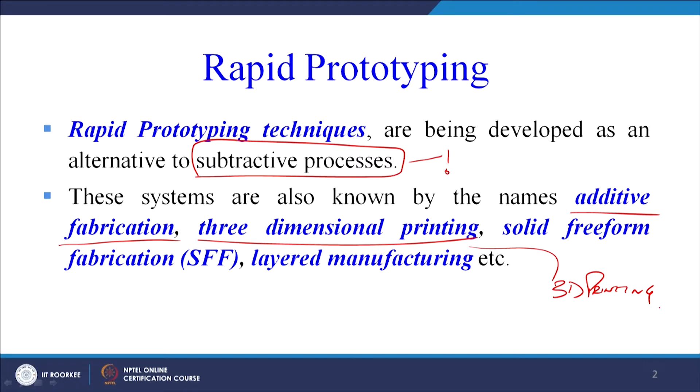These systems are also known by the names of additive fabrication, as I have already told, additive manufacturing, 3-dimensional printing, a very common rapid prototyping technique, 3D printing, then solid free form fabrication, layered manufacturing. There is a process called laminated object manufacturing, which is LOM. So, different strategies, different processes are there that fall under the broad umbrella of rapid prototyping.

Now, they can be classified based on the type of raw material that is being used in a process. We can use a photosensitive liquid polymer, in the stereolithography apparatus, where photosensitive polymer is used as the raw material. In case of selective laser sintering, we use powder as the raw material. In case of laminated object manufacturing, we use sheets as the raw material. So, we can classify the rapid prototyping processes based on a number of factors. One of the factors can be the type of raw material that we are using.

Now, rapid prototyping technologies are able to produce a physical model layer by layer. This is very important and already highlighted. We make a prototype layer by layer, a layer on top of the other layer, directly from their CAD models. As I have already highlighted, with the development in our computational systems, CAD models are being developed for most of the 3-dimensional objects, and then these models can easily be used to create a prototype layer by layer, one layer on top of the other, without any tools.

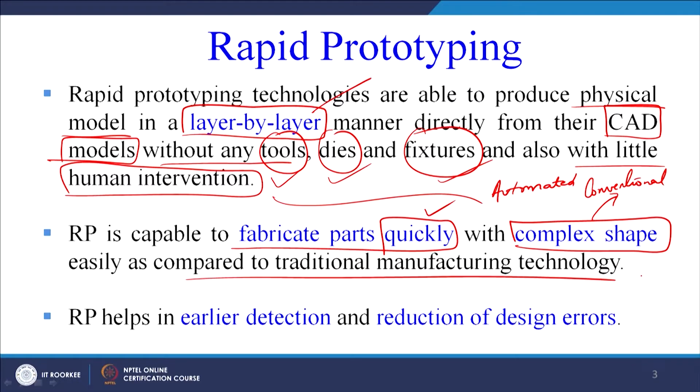Rapid prototyping helps in earlier detection and reduction of the design errors. As I have highlighted in the beginning of today's session, if 3 or 4 parts have to be joined together, we can create these parts from their CAD models easily using any of the rapid prototyping processes, and then we can try to assemble them and see the kind of interference, whether they are looking good or not, or what kind of joint can be better designed. So if there is a faulty design of a joint, it can be improved. So early detection of errors and remedial measures can be taken accordingly. So this will reduce the design errors.

Now rapid prototyping we are doing after our design has already been finalized. So the design is ready, now we are trying to prototype it. During the design we have taken care of all the guidelines that we have discussed till today. So these guidelines we are now trying to check using prototyping, and if there is a problem we will go back and try to change our design based on the various manufacturing guidelines that are known to us.

So therefore rapid prototyping is improving the timely manner in which we are able to launch our product in the market, or helping us to manage our time more effectively and efficiently, because quickly we are able to detect the error, immediately we take a remedial action, again we prototype and see whether the product is ready to be manufactured or not.

So we save time using the rapid prototyping strategies. Now what is the methodology? A very common diagram which is given in most of the books. So rapid prototyping in its basic form can be described as the production of 3-dimensional physical parts from computer aided design data in a decreased time scale.

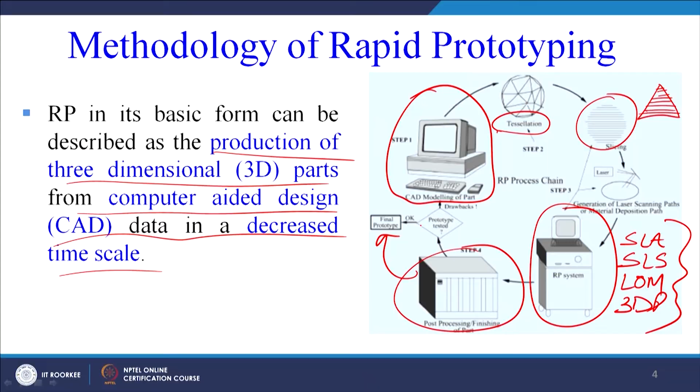We need a CAD model, then we have to do the pre-processing in which we decide the number of layers and the thickness of each individual layer, and then we take this file into our rapid prototyping system, where the physical 3-dimensional object or the prototype is created. Then we do the post processing; any support material we have used during the creation of our 3D prototype has to be removed.

Sometimes additional curing may be required, sometimes some surface treatment or surface cleaning may be required. So all that is done during the post processing of the prototypes, and finally our prototype is ready to be used or to be checked. So for this process there are standard guidelines that have to be taken into account. Now what are the design guidelines? Let us try to see those guidelines.

The first thing is how big a prototype we can produce. So the average workspace, and the word average here is very important, because as I have already told, 70 to 80 different processes fall under the broad umbrella of rapid prototyping. So the average workspace available in commercial RP systems, and this is general, not specific to any one rapid prototyping process, is 150 millimeters to 380 millimeters in X direction, 150 to 390 in Y, and 150 to 380 in Z direction.

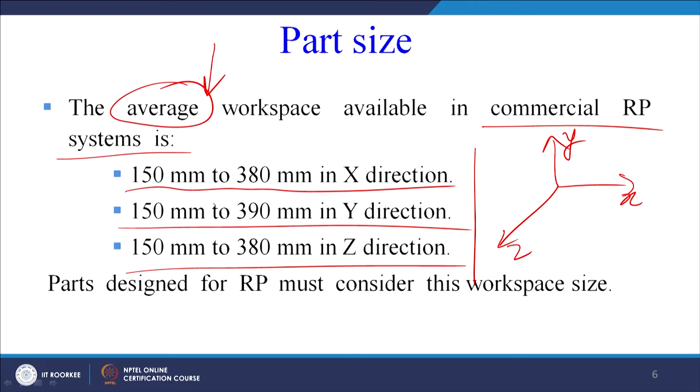So there are 3 directions, X, Y and Z. In all the directions the dimensions are given for the maximum size of the prototype that we can produce. Parts designed for RP must consider this workspace size. Different types of machines will have different workspace arrangements, or different biggest sizes of prototype that you can produce. So all those things have to be taken into account when you are designing your product.

Many times it may happen that our product is much larger in size compared to the workspace available in the rapid prototyping machine. So we can scale down our model, so that the prototype we are creating is a scaled down prototype as per the dimensions available in the machine we are using to create a physical 3-dimensional object. All those possibilities do exist, and we must take advantage of them wherever possible. Regarding part size, when a part is too large, decompose it into smaller sections. So that can also be done.

Suppose we want to create a model of a very large torch, which is not possible to create in a single part. So we can decompose, or explode, the complete product into individual parts, and each part can be created using any of the rapid prototyping machines, and then we can assemble the parts.

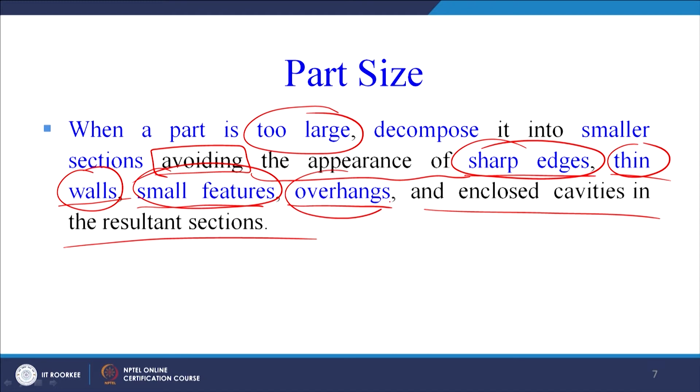So we must decompose the bigger product into smaller sections, avoiding sharp edges, thin walls, small features, overhangs and enclosed cavities in the resultant sections. So we can decompose the large part into smaller parts, but all these guidelines we must keep in mind, otherwise even the smaller parts will become difficult to fabricate using the rapid prototyping processes.

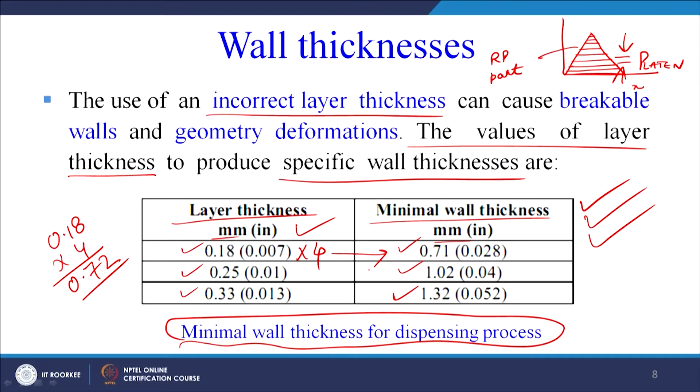For the sintering process, the recommended minimum wall thickness is 1 millimeter, and for SLA the recommended minimum wall thickness is 0.508 millimeter. So, these are the other two processes, sintering and stereolithography apparatus. The minimum wall thickness is given. So, when we are trying to make a prototype using these two processes, the minimum wall thickness is already specified, and wall thickness is not a new term that we are using in today's session.

We have used this term in the case of the injection molding process, the sand casting process, and the die casting process also. So, for rapid prototyping processes also the minimum wall thickness has been specified. So, when we are designing our part and we know that this part has to be made by a prototyping process, maybe SLA, we must take care of the wall thickness requirements. So, for the sintering process the recommended wall thickness is 1 millimeter, and for SLA the recommended wall thickness is 0.508 millimeter.

A post processing is required to obtain the close tolerances in the hole. So, this is another guideline. As I have already told, once our physical prototype is ready, we have to do the post processing in order to get a final finished prototype.

Holes should be oriented in such a way that their axes are perpendicular to the building platform. As I have already drawn one picture in the previous slide, suppose this is a building platform and this is the prototype that we are trying to produce. So, what must be the orientation of the hole or the axis of the hole? The hole should be oriented in such a way that their axes are perpendicular to the building platform.

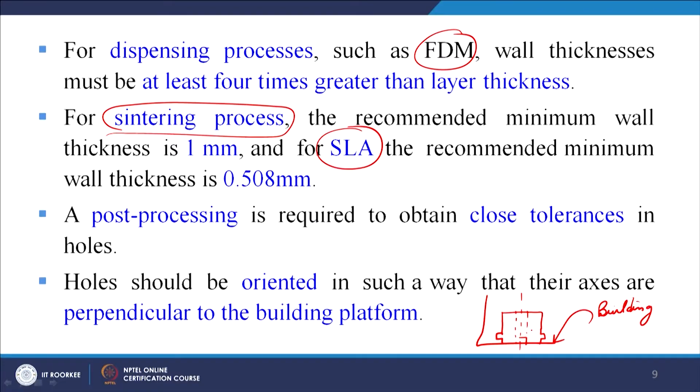So, this is our building platform, and we have to see what must be the axis of the hole. So, we will like to have the hole like this. This is the center axis. So, the axis of the hole must be perpendicular to the building platform. This is the perpendicularity which is shown here. So, these are the specific guidelines that we must take care of.

Now, if there are fillets and knife edges, if required, square corners should be rounded. So, we must avoid the use of square corners and we must try to round them off. Sharp edges should not be less than 0.8 millimeter for sintering processes. So, sharp edges must be avoided. Its range is also given, should not be less than 0.8 millimeter. Do not locate small features in areas that require support structures.

Now, I must address this support structure issue here. Once we are trying to create a 3D model using any of the rapid prototyping processes, usually two types of material are used. One is the build material, another one is the support material. The build material will actually create the prototype, and the support material will support wherever some overhanging portions are there, or wherever some sectional thicknesses are such that there is a tendency of the build material to deform. So in those cases we will reinforce it with the supporting structures or the supporting materials.

So this is an important guideline, that do not locate small features in areas that require the support structure. These small features can be deformed during the process, so we must avoid these small features near the support structures, otherwise they may get damaged during the removal of such structure. At the end of your rapid prototyping process, we will go for the post processing, wherein we will be removing all these support structures.

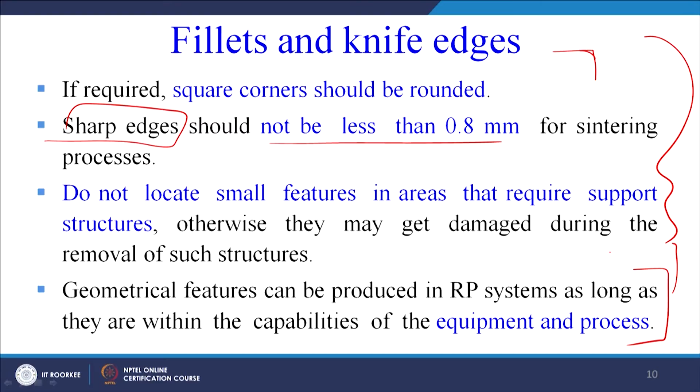So if we have a very small feature near to the support structure and we are trying to remove the support structure, this small feature may also get damaged. So that must be taken into account when we are trying to rapid prototype a part. Geometrical features can be produced in RP systems as long as they are within the capabilities of the equipment and process. This is a summary of what we have discussed here. Whatever is the capability of the process, we can make the parts as per the process capability.

Now part orientation is also very important. The part should be oriented with the minimum height matching the build orientation perpendicular to the construction platform. So again, suppose this is the construction platform which is going to move up and down. The part should be oriented with the minimum height matching the build orientation. So we have to see what is the minimum height, and it must match with the build orientation.

The amount of support structure should be minimized. This is very important, that we must try to minimize the support structures that are going to be used for making our prototype. The largest surface of the model should be supported on the building platform, especially in the dispensing processes.

Let us take another example. This is our platen which will move, suppose it moves down. So the product is, suppose, something like this. So the largest surface must be there on the platen. That is the guideline. This guideline states that the largest surface of the model should be supported on the building platform, especially in the dispensing processes. One of the examples of dispensing process is fused deposition modeling.

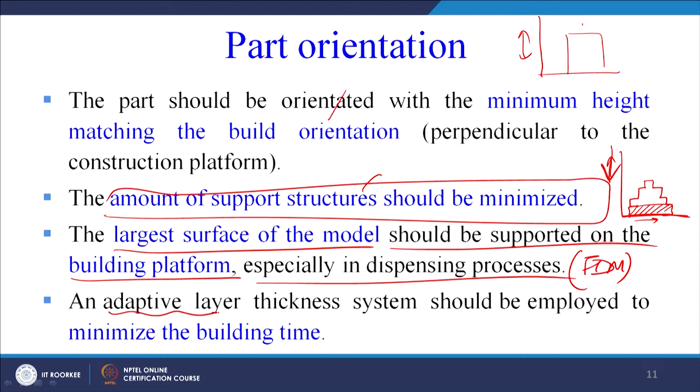An adaptive layer thickness should be employed to minimize the building time. That is another approach in most of the rapid prototyping systems, that an adaptive layer thickness system must be employed. In the next slide we will see what is the difference between an adaptive type of layer thickness system and a general layer system.

So layer orientation and path planning. Visual models should be filled using an open array in order to reduce the material usage and cost. Now there are open arrays; we can select the fill density in our model as per our choice. So maybe in many cases we just want to see how the product will look like.

So we need not make a very dense rapid prototyped product, because if we make it very dense, suppose we select in one of the rapid prototyping systems 100% density. 100% density means that it will be a fully dense product. We just want to see the shape, so there is no need of making it 100% dense. We can select 50% density, we can select 30% density also.

So the visual models should be filled using an open array. Suppose we set 50% density or 30% density; different machines will have different levels, but if we select a less dense product, we will save the material, reduce the material usage, as well as the cost will be less.

Parts that will be under mechanical stress. Now suppose we have developed a fully functional prototype, so the part is under mechanical stress, and we are going to test it for some specific requirement. For parts that will be under mechanical stress, a closed and alternating filling pattern should be used to increase the mechanical strength and reduce the orthotropy effect.

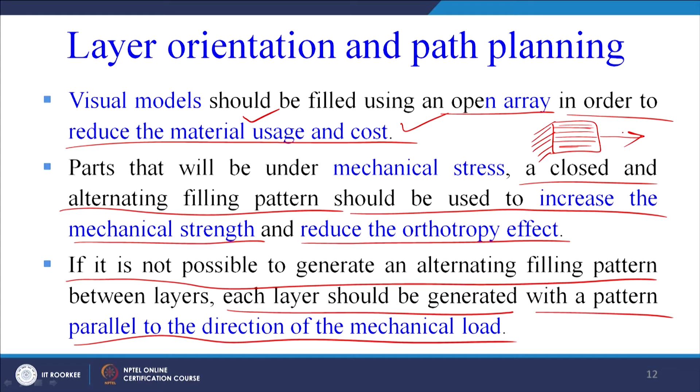So two things by now we have been able to understand: how dense our product or prototype must be, and what must be the filling pattern of this volume, so that we are able to generate a prototype which can withstand the mechanical stress that is going to be exerted on the prototype for testing purposes.

Now there can be chances of distortion, shrinkage and warping, because here the shrinkage will take place on solidification. So how to overcome that? Small layer thicknesses should be employed. As we have already taken an example, again I am making the same part. So this thickness X must be less. Small layer thicknesses should be employed.

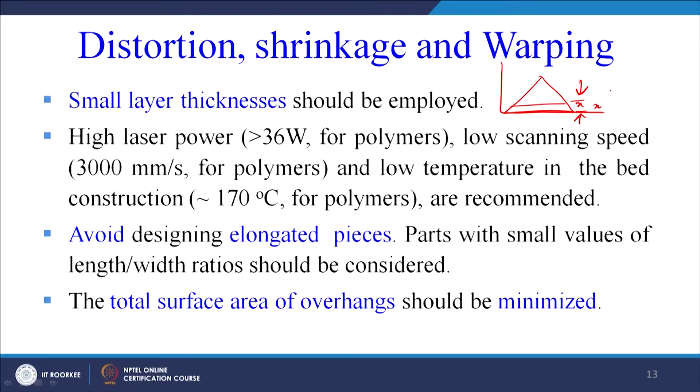High laser power, maybe greater than 36 watts for polymers, low scanning speed, 3000 millimeters per second for polymers, and low temperature in the bed construction, approximately 170 degrees centigrade for polymers, are recommended. A very good guideline specifically for making prototypes out of polymers or plastics.

The laser power is given, the scanning speed is given, and the lower bed temperature is also given. So if we keep all these parameters in mind while we are doing the rapid prototyping process, we will be able to make good prototypes which will not be prone to failure.

Avoid designing elongated pieces. Parts with small values of length to width ratio should be considered. Long parts are usually not recommended to be made by rapid prototyping. So we must take into account this length to width ratio while designing parts which have to be made by rapid prototyping processes.

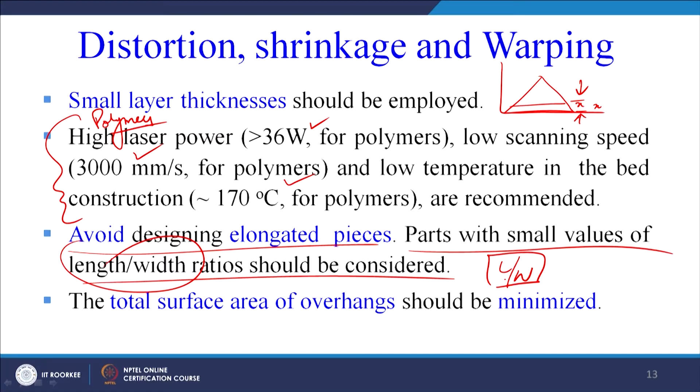The total surface area of the overhangs must be minimized, because whenever there is an overhang, we need to provide a support structure, and already in one of the guidelines we have mentioned that we must try to reduce the use of support structures.

So because support structures later on during the post processing have to be removed, and the removal may lead to failure or damage to other similar or small cross sectional parts. So therefore we must try to minimize support structures, and this is where it comes from: when support structures have to be minimized, the overhangs must also be minimized during the designing stage itself.

Now what is the surface finish? Small layer thicknesses and surface angles close to 90 degrees should be used to obtain low values of surface roughness and reduce the staircase effect. Now what is the staircase effect? Suppose this is one layer, I am showing it on an exaggerated scale, this is another layer. Suppose this is the third layer that we are depositing.

Now suppose this is our platen on which we are making it, this is moving down. So this is one layer, second layer, third layer, this is the staircase effect that takes place, and maybe this is the angle theta which is mentioned here. So we must try to minimize it, because this will depend upon the layer thickness. This staircase effect can easily be optimized based on the individual layer thickness that we select and the surface angle theta; we can optimize these two to minimize the staircase effect.

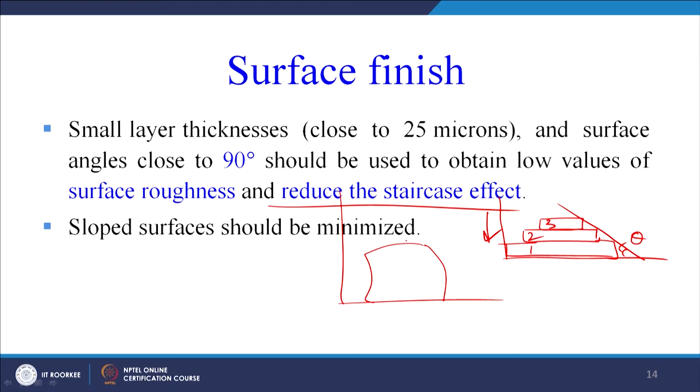So smaller layer thickness, close to 25 microns, and surface angles close to 90 degrees should be used to obtain low values of surface roughness and reduce the staircase effect. Sloped surfaces should be minimized. So if we have sloped surfaces, maybe something like this, these surfaces will definitely have a staircase type of effect. So sloped surfaces should be minimized during our design process.

Now stability. Part should be oriented with its highest surface area on the building platform. This is to ensure the stability during construction, already discussed. I have explained it with the help of a diagram. Total curing of the part should be ensured in the curing process, very important, because the parts will polymerize and solidify once the curing is complete. So we must ensure complete curing of our prototyped parts.

Pieces made of paper, wood or cornstarch should be coated to provide protection against moisture. As I have already told, rapid prototyping processes can be classified based upon the raw material that we are using. So if our prototype is made of paper, wood or cornstarch, we must try to coat it during post processing of the prototype in order to avoid moisture absorption.

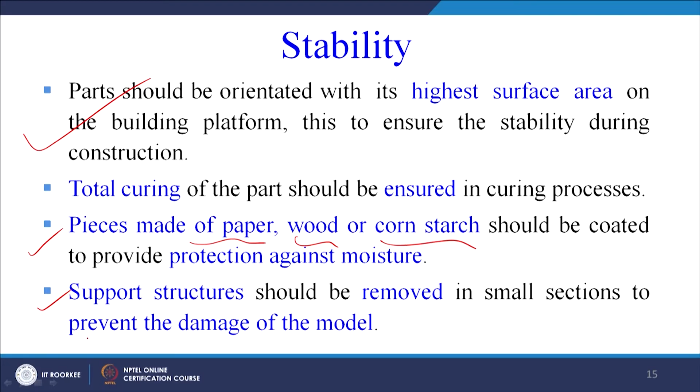Support structures should be removed in small sections to prevent damage to the model. So if we have used a support structure, we must remove it chunk by chunk or in smaller sections, in order to avoid the damage that may happen to the overall prototype or the build material of the prototype. So with this we can conclude today's session on rapid prototyping.

So we have seen that when we are trying to make a prototype using any of the rapid prototyping processes, we must take into account these guidelines related to how dense our prototype must be, what must be the orientation of the prototype, and if holes have to be made, what must be the orientation of the holes. The bigger portion of the prototype must be placed on the platen so that we can build it in a proper manner. So all these guidelines we must take into account, related to the thickness of the individual layer and the surface angle.

So if we follow all these guidelines, we will easily be able to produce a prototype which can be a fully functional prototype, or just a visual model of the object that we want to produce. So rapid prototyping is one of the important strategies that must be adopted during our product design process in order to save time. We have seen that important parameters like the fill density and the deposition angles or deposition directions of the material are definitely going to define the quality of the prototype, and these must be selected judiciously in order to make a good prototype.